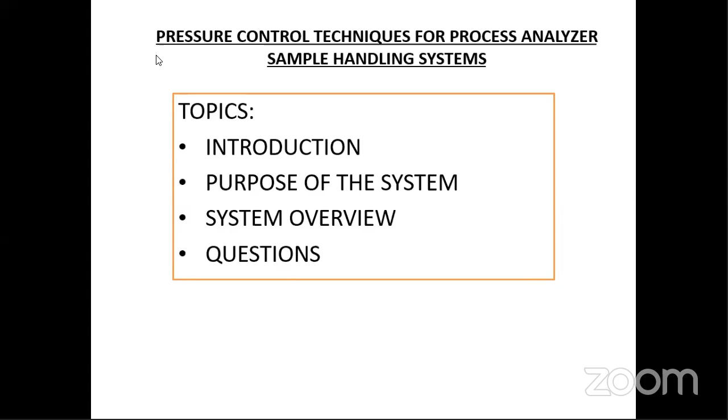Introduction - we've already talked about introduction. I worked for Parker Hannifin. Prior to that was Veriflow Regulators, and prior to that was Dow Chemical, and prior to that was Destec coal gasification. So we've got a lot of miles on this, so to speak. But Parker has gotten into the analyzer end of it pretty good. I want to talk about the purpose of the system, what it does, what problems it solves, system overview, and then any questions you might have.

The purpose of this system is to collect the sample. All analyzers require a sample flow from the process line - you transport it, analyze it, then you have to dispose of it. This system handles that part of the process. It provides the analyzer with a very stable vent pressure. Most of these analyzers, the measurement cell operates under atmospheric pressure, or whatever pressure it operates under, and it has to be stable and constant. It could be an elevated pressure, as long as it's constant. Most people used to use atmosphere because that's fairly constant and easier to use since it's always there.

Now we also have environmental regulations. The EPA guys come along and say you can't do that anymore. You have to collect these samples, control where they go, and dispose of them properly, typically to a flare header, or back into the suction of a process compressor or back into the process. So you have to get it, analyze it, and get rid of it. And you have to minimize any kind of contact with humans. You've got some really bad stuff out there.

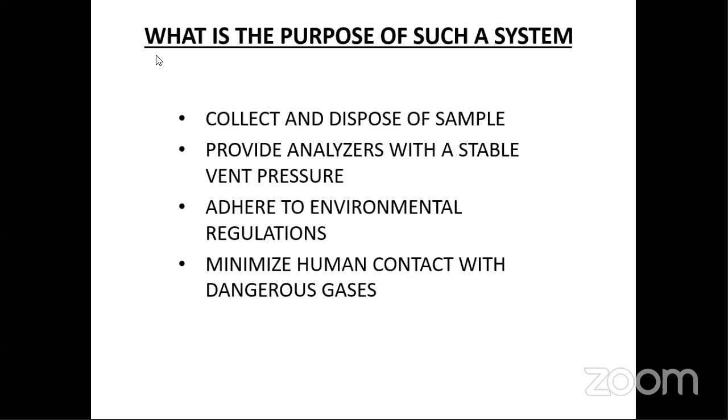I did this just as an exercise. What kind of flows are we talking about out of an analyzer? A typical analyzer is going to have 4 liters a minute flow. That includes the sample through the analyzer and what's called a fast loop sample. So 4 liters a minute is fairly common. If you do that, 4 times 1440 minutes per day, you're talking 2 million liters per year, or 74,000 cubic feet a year.

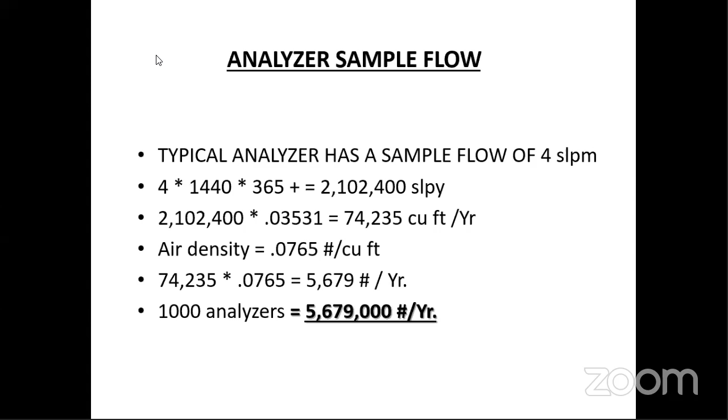And if you use air as a density, as an example, that's 5,000 pounds of stuff per year. If you've got 1,000 analyzers, that's 5 million pounds of stuff per year going somewhere. You say, well, who's got 1,000 analyzers? Well, a lot of people have 1,000 analyzers. I worked at Dow, we had 1,200 analyzers. Exxon in Baton Rouge probably had over 1,000 analyzers. There's a lot of facilities with 1,000 analyzers, but you can figure out how many you want. 5 million pounds a year is certainly significant enough to manage and collect.

So in the old days, your analyzer would be vented to atmosphere. You take a sample out of the process line, regulate the pressure down, control it through a rotameter needle valve into a continuous analyzer or GC, wherever you want to go, into this vent header. A vent header is a collection header that's usually in the analyzer shelter, and it collects all the effluents from the analyzers. Then it goes from there somewhere — used to go to atmosphere. That means the analyzer cell is basically floating on atmospheric pressure, which is fairly constant, and everybody's happy.

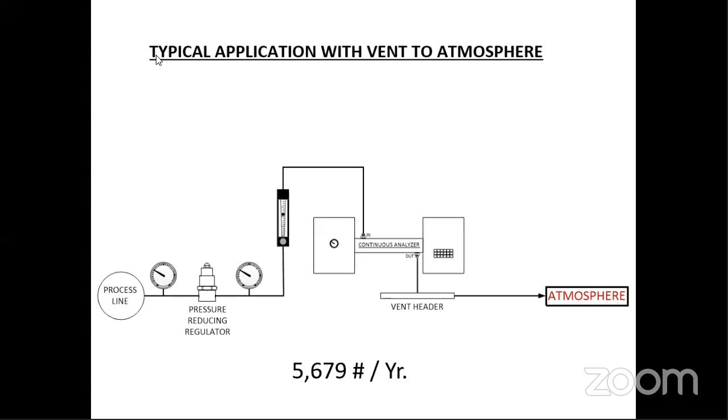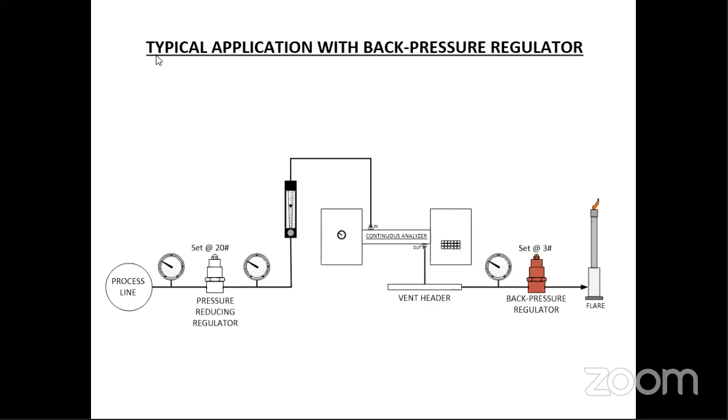Except the EPA. So what people started doing is putting in a back pressure regulator right here. It comes through just like before, except instead of going to atmosphere, it goes through the vent header and the back pressure regulator. The purpose of this is to back-pressure the analyzer at a pressure above the fluctuation that occurs in the flare. A flare header typically runs anywhere from half a pound to 1 or 2 pounds on a normal day. So if you set this thing at 3 pounds, you're controlling and operating above the fluctuation on the flare. However, what happens when the flare shoots up?

And it happens actually quite often. So this regulator, if it's set at 3 pounds and you have 5, 6, 10, 20 pounds over here, your flow stops — your analyzer cannot flow from 3 pounds against 20 pounds. So you've got to do something about it. This is fairly typical, and a lot of people live with this today; they just set a back pressure regulator right here. That also means your analyzer is running at an elevated pressure whether you want it to or not. A lot of analyzers, you don't want to run at elevated pressure — a lot of measurement cells can't handle 3 pounds or 10 pounds or whatever. But this is fairly common.

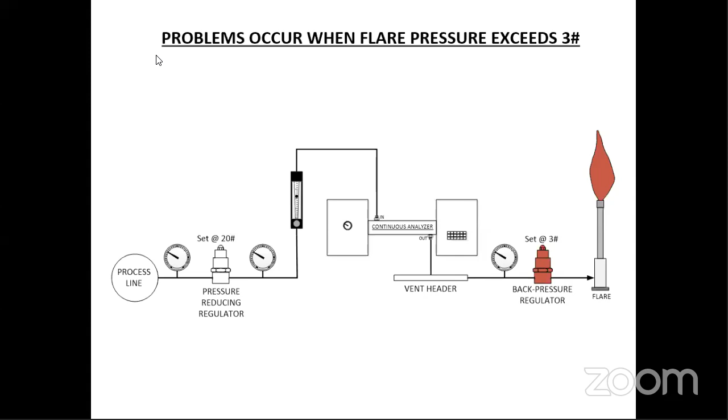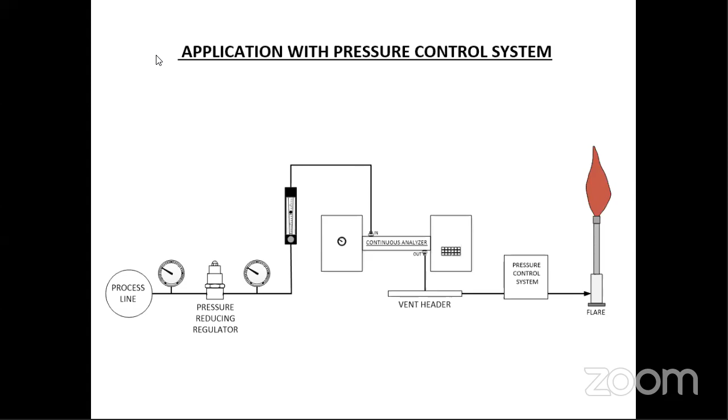So what's the solution to this? You put in a pressure system that collects what comes out of the header and pumps it to the flare at whatever pressure. This thing maintains a constant pressure in the vent while the flare pressure is going all over the place, totally isolating this pressure from that pressure. By the way, this system has been an operating system out for 15 years, literally all over the world, and it's very successful — it works great.

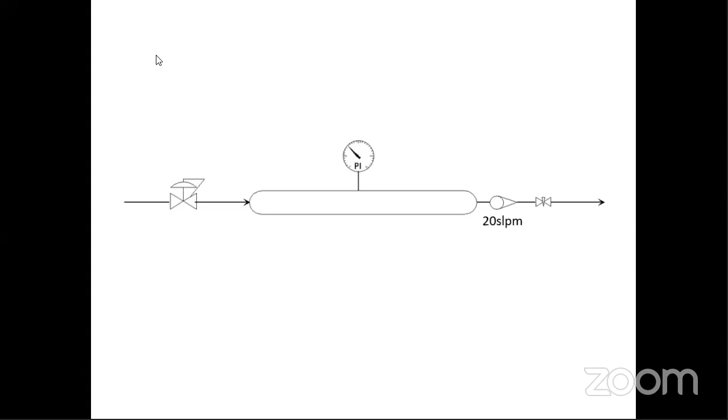And the way it works is very simple — usually simple works better. This pipe could be your vent header that you're trying to control. You put a regulator on one end, it controls the pressure in this pipe, and you take the flow out over here. So as you take flow out, the regulator makes it up, and you maintain a constant pressure in the header, and everybody's happy.

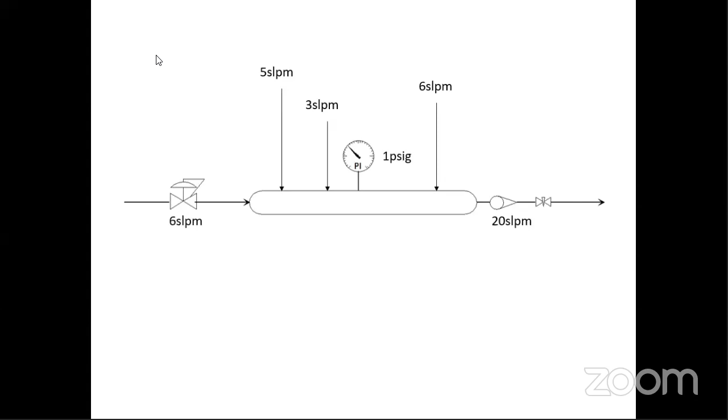So if you start contributing flows into the header, and you're still taking out 20 liters a minute, now you're putting in 8 over here, and you're taking out 20, this guy only has to put in 12. But it's maintaining a constant pressure by controlling the balance. If you keep adding flows, say 8, 6, 14 going in here from analyzers, and you're taking out 20, this guy over here drops down to 6. So the key to maintain a constant pressure in this header is that you have to take out more than you're putting in, so this guy can always stay flowing, controlling the pressure. And it works quite well.

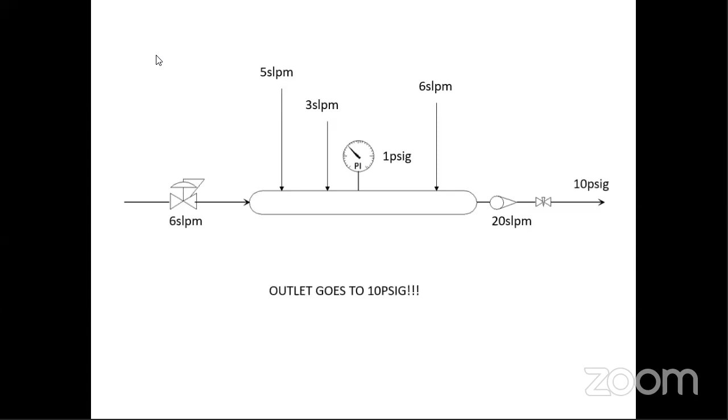So what happens if this pressure exceeds the vent header pressure? Well, you have to have a pump. Some of these back pressures, the planner comes and says, we get 35-pound back pressure sometimes, what are you gonna do about that? Put a pump on it. So the bottom line is, if you can pump it, this thing will work. You just got to find a pump that will pump into whatever back pressures you're exposed to.

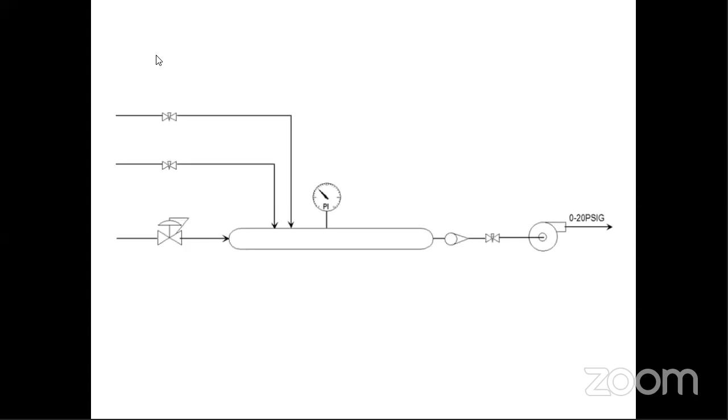So a typical system uses a solid state pump, an eductor. I call it eductor, aspirator, or whatever you want to call it. Take a motive force gas, discharge it through this tail section, and you produce a suction here. And they're very... no moving parts. These things will sit out there for years and years with no moving parts, as opposed to a mechanical pump.

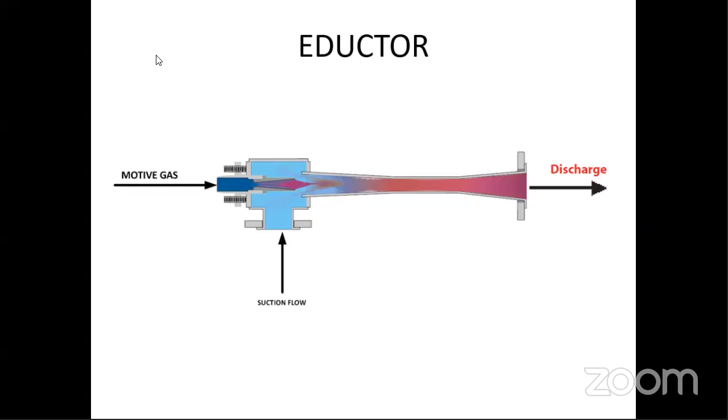So the problem here is this eductor. In order for an eductor to work against a back pressure, they don't like back pressures, so you have to put a lot of motive force gas into them. It takes a big eductor to work against 20 pounds of back pressure and still flow 20 liters a minute through this side of it.

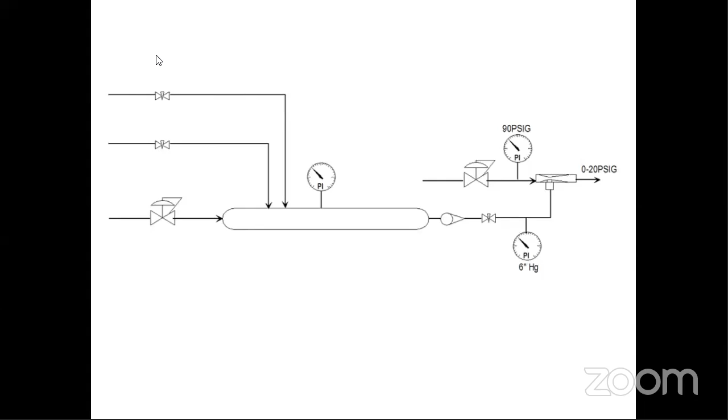So what we incorporated is an economizer circuit, if you will, right here. What this guy does is look at the vacuum that this eductor is pulling, and it throttles this pneumatic booster relay, a multiplying booster relay essentially. If this vacuum starts to diminish, get more positive, we lose vacuum because the back pressure is increasing, because the flare pressure is going up. As you start losing vacuum, this guy right here is looking at this vacuum and says, whoop, we got to boost this up a little bit, drive this guy a little harder. And that's what it does. The motive force gas pressure could change - I have a chart later - but it's anywhere from 30 pounds to 90 pounds, depending on how much back pressure the flare is producing. So it saves a lot on the gas.

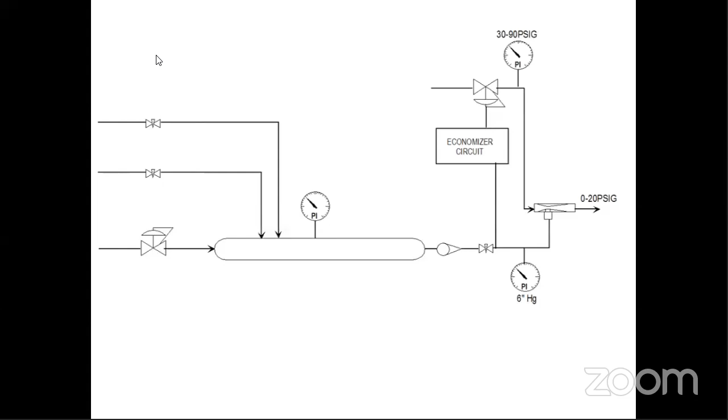All right, that guy right there, you've probably seen before. If you walk outside your house and look at your gas meter, you'll see one of these things. This is a very sensitive pressure regulator, and it's very reliable. So why are you using this thing? Because it's so damn sensitive. This thing can control within 1/10 of an inch of water, which is way beyond what you need for a typical analyzer system. Also, you can get by with a carbon steel body.

Yeah, but I got all kinds of bad stuff in my header - how are you going to get by with a carbon steel body? Well, the stuff in your header doesn't pass through this regulator. The only thing that goes through here is the nitrogen making up the header, so it doesn't see any corrosives or things like that, as opposed to if you were to put something like a back pressure regulator on your vent header - everything in the header would have to pass through it, so you'd need some exotic metallurgy. Where with this guy, you can use literally carbon steel.

So to test how well a regulator controls - and a regulator is a proportional only controller, a very crude proportional only controller - it says that if you change the flow through it, you're going to get a different pressure. It's just got to do that. So that's the only way to work.

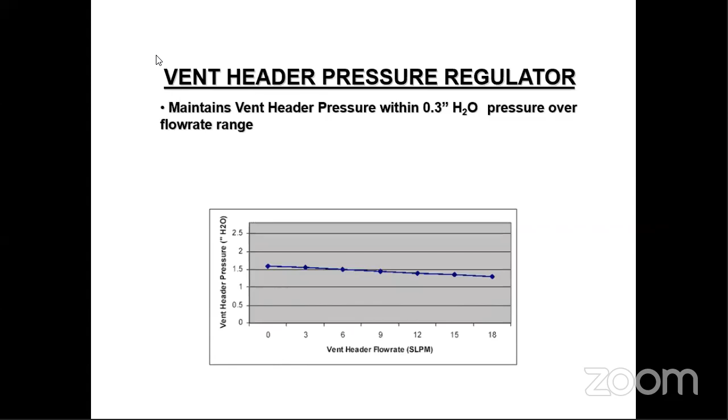But the only way to test it is to get your water manometer and look at the meniscus in there, and it just doesn't hardly move. It's so sensitive. So, all right, that regulator is right there.

So this guy sits on the header. What it's doing is controlling the pressure right here on that header - not there, right there. So the caution is you don't want small tubing for a header because you get pressure gradients. You want this to be big and the flows low, so the pressure over here can be really close to the pressure you're controlling.

So if you provide this regulator with a source of supply pressure, it will pressure this header up as necessary to maintain that pressure balance, while you're sucking it out over here with your eductor, and your analyzers are putting it in over here.

So you might note that when you order a regulator like that, it has a range spring in it - 1 to 3 inches of water, 6 inches, whatever range you want. But most people want to run their analyzers at 0, because that's a good place to run them.

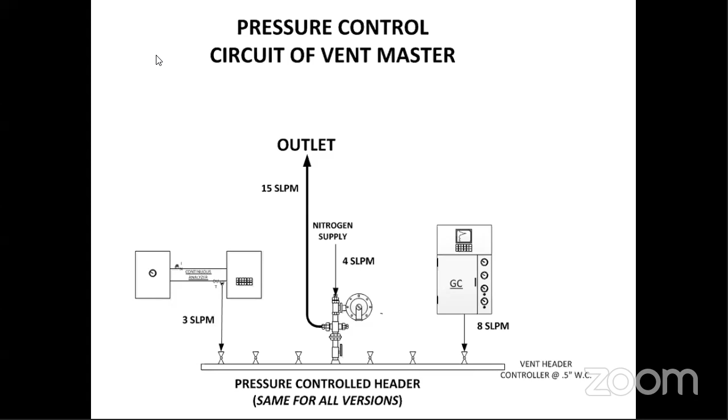Okay, so this is the pressure control part of it right here - this does all the pressure controlling. This is the pump. It doesn't look like a pump, but that's what it does - it sucks out of here and goes out to a flare or wherever you want to go.

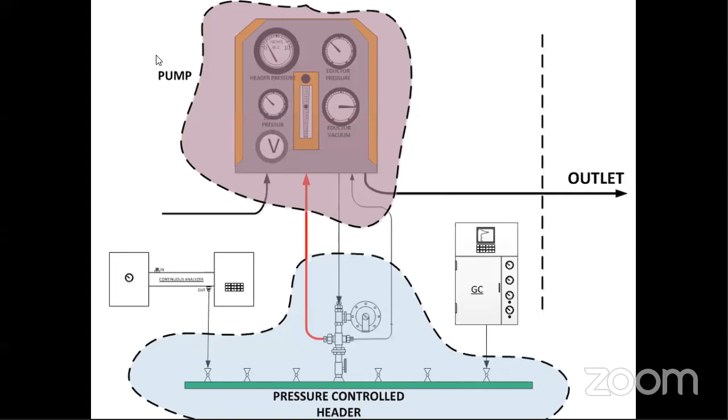And a typical system looks like this. This nitrogen supply regulator maintains a pressure to this box for pneumatic - it's a pneumatic device, old school. And then right here is your vent header pressure gauge, eductor motive force pressure. That changes with the back pressure from the flare.

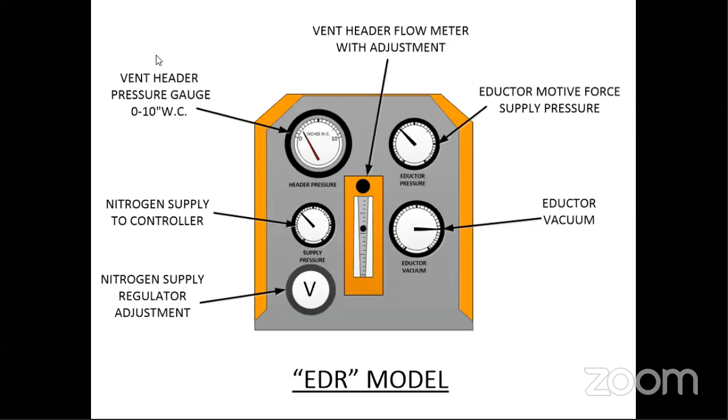And then here's your vacuum - this will stay fairly constant. It doesn't have to be perfectly stable all the time, but that's your differential across this needle valve right here that controls the flow rate. So you've got two flow pressure controls going on - a flow control with this needle valve differential, and the big regulator controlling the pressure in the header. So you've got a very stable system.

This is the system. Again, it takes about 100 pounds of supply gas, typically nitrogen. A lot of plants use natural gas - natural gas will drive these eductors just like nitrogen will.

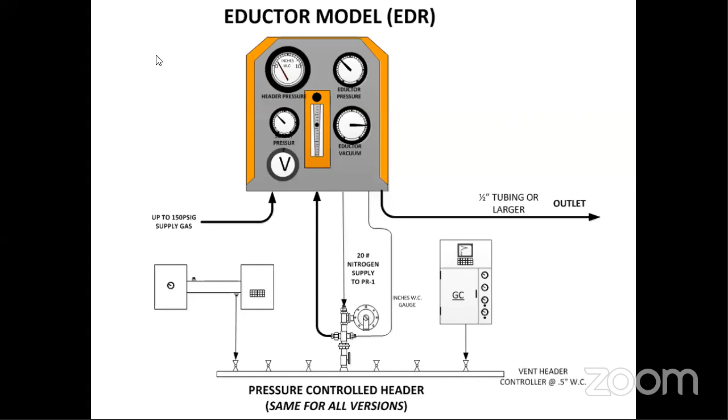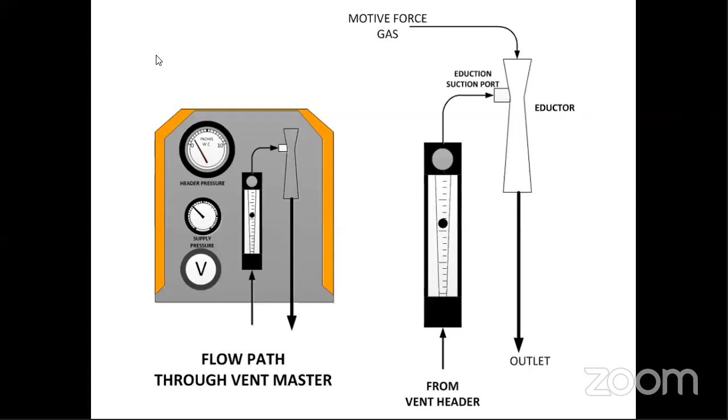What's inside the flow path: you go through the rotameter, the eductor, and out. So this is your quote wetted path right here. So if you have some really corrosive devices, you only have to concern yourself with the eductor and the rotameter - this could be an armored rotameter or a glass rotameter.

The eductor, this typically shows the suction, the performance of an eductor. They got different size eductors. This is the biggest one, we call it A eductor.

Why you have different size eductors is because you want to absolutely minimize your motive force gas usage. So you look at these charts and say, well, I can get by with the smallest eductor based on what the maximum back pressure I expect to see. So if you got the worst case and you're going to go to 20 pounds of back pressure and 20 to...

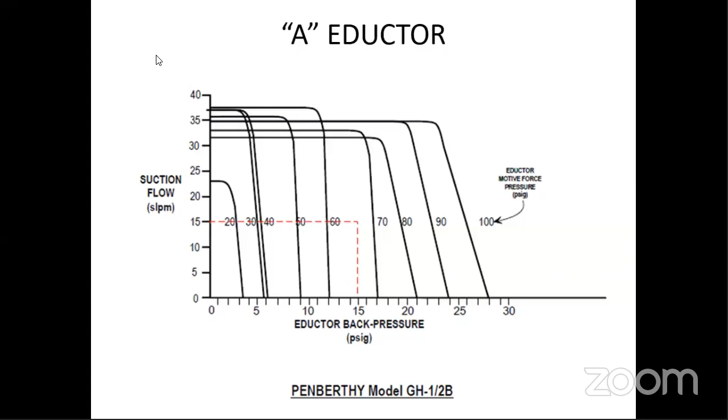25 liters per minute of sample flow, then you need a bigger eductor. That's A eductor, and then they got what's called a B eductor, which means it's a little smaller, and then they got the C eductor. It's even smaller. So if you're not going above, say, 5 to 8 pounds of back pressure, you can still get a lot of flow through that guy. And that eductor literally is the size of a 1/4-inch tubing T. It looks just like one. You can't really tell the difference between it and a 1/4-inch tubing T. That's how small that thing is.

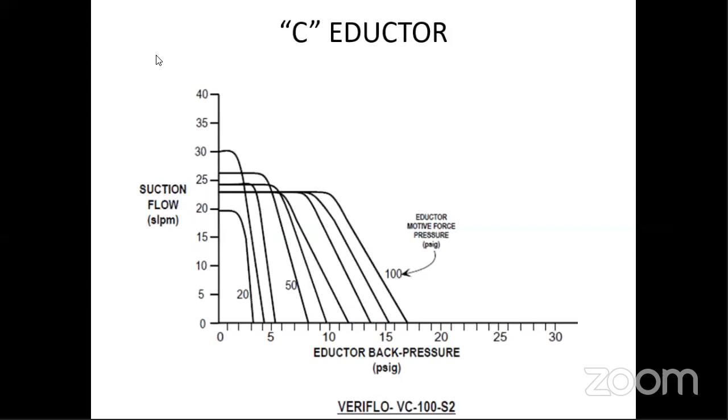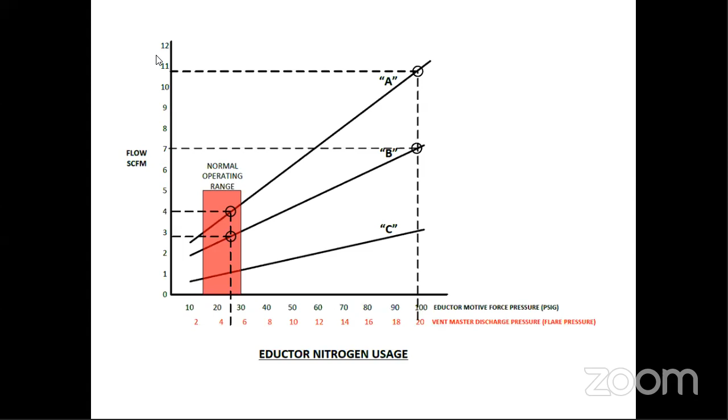All right, this is the nitrogen usage on these three eductors, A, B, and C. Typically your flare pressure is relatively low, and you're going to be kind of in this region right here. So you're not going to be using a lot of nitrogen. You can run these off a bottle, but most plants have nitrogen service anyhow.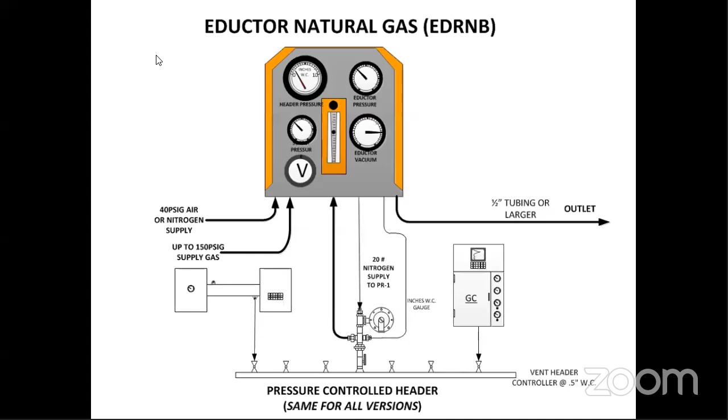This is EDR, we just call it natural gas. The model before that uses nitrogen. Some of the relays in there breathe to atmosphere, so it might breathe a little nitrogen out. But if you're running it on natural gas, you probably don't want this thing breathing natural gas out. So we have a model that doesn't breathe, it's a non-bleed type. That's what the NB is right there. So there's a lot of these guys in these gas plants that use this version, and they use natural gas as a motive force gas.

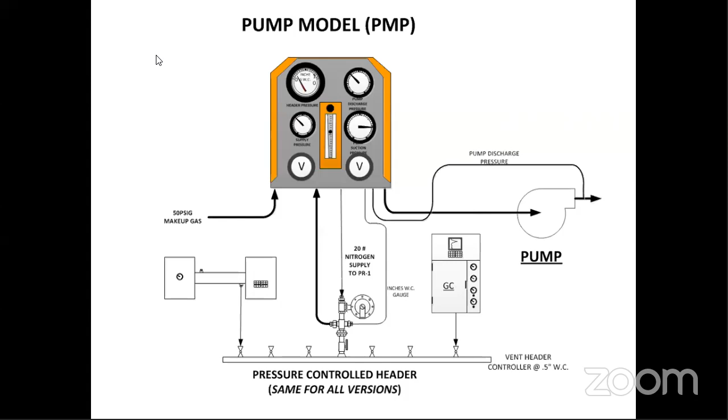So what about liquids? Can this thing handle liquid? Well, you don't want to get a solid flow of liquid in your system, just a gas system. So you need to handle it down on the headers over here. If you expect to have a lot of condensation going on in your header, liquids collecting, you probably need to slope this down to some sort of a liquid sump pump combination. And this pressure, you're basically controlling the head pressure on that trap.

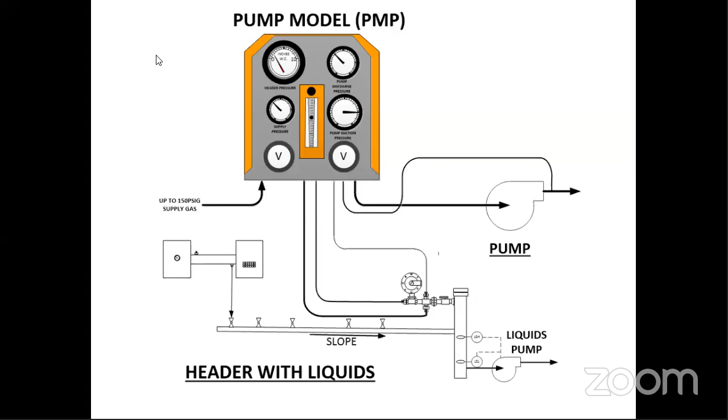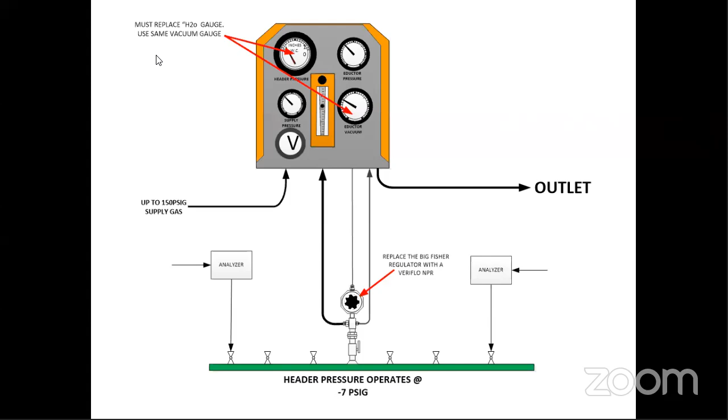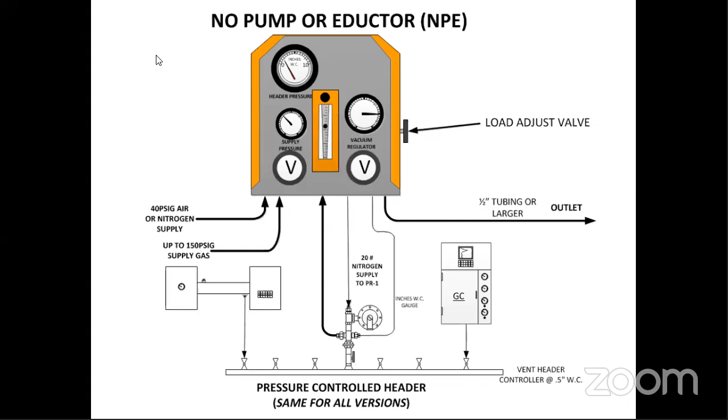You can even get the eductors to go down to some pretty negative pressures, or you can put pumps on them. Let's say you have a system where you already have a scavenging system in your plant that runs on a negative pressure. Well, you just connect this to that. It's just looking for a lower pressure to go to, basically. If you got a lower pressure somewhere, it's fine. And this sort of adjusts the load through this system. This system can't change your plant system, so you kind of isolate it with this load valve, if you will.

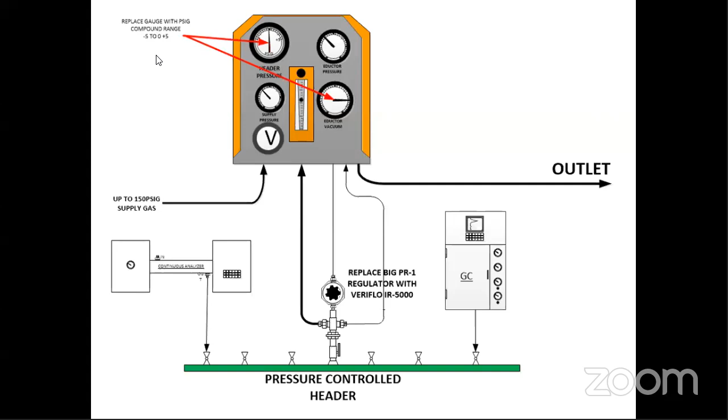That's a different regulator. These regulators, that first regulator I showed you, they have internal relief valves on them. And some plants said, I don't want any relief valve on my regulator. It's okay, no problem, you can get that regulator without a relief valve. And I said, well, I don't know if I want that regulator anyhow. Well, you can put this guy right here. This is a metal diaphragm regulator, standard analyzer grade type regulator, and you can change the set point wherever you want it.

Okay, this is another way to do it. This is different ways how you can hook these things up. For instance, this regulator, the big guy, has a dome vent on it. And you should never, ever connect that dome to a flare or someplace like that, because that's your reference pressure for your regulator. If you connect this to a collection system somewhere, that regulator is going to follow that collection system pressure. So you don't have anything stable anymore.

So typically this is atmospheric pressure. If you're concerned about the relief valve opening up, you can vent this to an atmospheric header, which has a little loop or whatever, but you have to maintain it at a constant atmospheric pressure. And then the pump can have another regulator. So what you have here are dual headers - you've got this header running at atmospheric pressure, and you have this header running wherever you want it, like for fast loops.

Another thing about this header is pulsating flows. These regulators can only do so much in controlling the pressure, and typically what's happening is that the regulator is only putting gas into the header - it can't take gas out of the header. So if you blast that header with a pulse of pressure somewhere, you have to wait for the normal flow to pull it back down to set point.

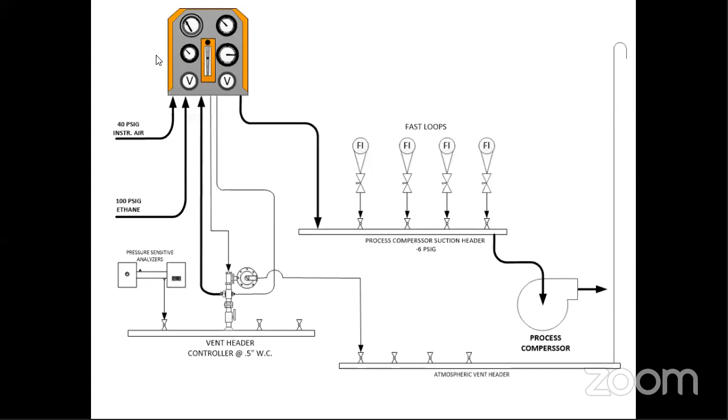So you don't want to pulse these guys, but you can pulse the hell out of this one. A lot of stream switching valves have a double block and bleed, and when they switch, you take the bleed or the pulse and send it somewhere - you can send it right here. You can pulse this guy, but you don't want to send it right there. So you need to minimize the pulsing going on in the header.

This is a vent system with a standby pump. Typically a flare is not going to run 30 pounds of pressure - that's crazy. With Dow, we used to have these big flares, a 36-inch feed line, and when that thing was flaring wide open, the ground was shaking. It was really bad.

So how often does that happen? Every 2 years or something like that. So you don't want to run a mechanical pump for 2 years waiting for that situation to occur. So you can run this thing on an eductor, which you're normally going to run within the 20-pound range. And if it ever goes to high pressure, you can put a high pressure switch on it, turn on the pump, and it will discharge through these check valves.

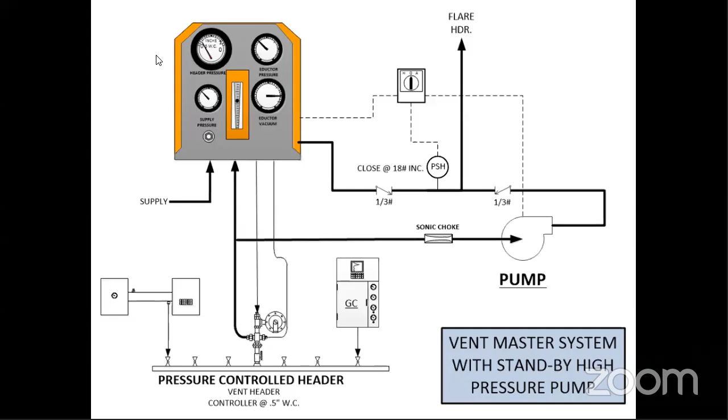This is called a sonic choke. A sonic choke is a device that's basically a flow controller, if you will - it's a solid state flow restrictor. Once this thing is choked, you can't increase the flow. So you size this guy for the maximum flow that you want to take out of this header and just let her eat. Worked good.

This is basically the same system with the sonic choke on it. This is a typical system - this regulator controls it at atmospheric pressure, but there are some places on Earth that have large...

...rapid barometric fluctuations, especially in Canada, the north, and the western section. The fronts come through and the barometer drops like crazy. Well, if you've got all your analyzers on these guys, you can see 3% error easily - that's just 1 inch of mercury variation in the barometer.

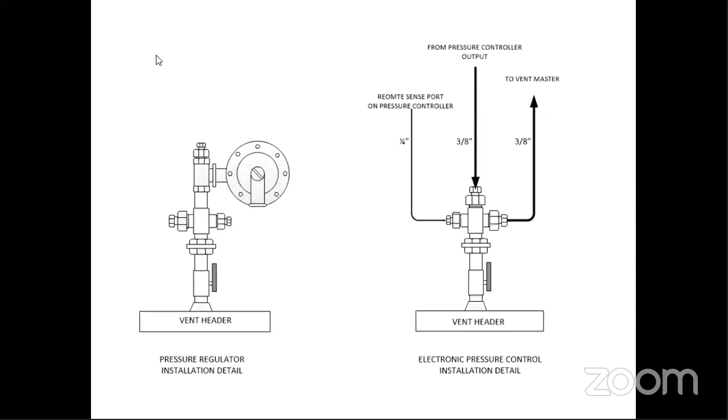So we have plants up there that said, man, I can't stand that anymore - these fronts come through and it just throws my analyzers all over the place. So what can you do? What we can do is take this regulator off, and we still use the T right here. We're going to control this header with an absolute pressure controller, an electronic absolute pressure controller.

Typically what you want to do is control this thing slightly above the typical barometer reading - essentially, say, 30 inches of mercury. Your barometers don't usually go too much over that, so you're typically going to stay positive in your header. But relative to the atmosphere, it can be more or less positive.

So you stick a pressure gauge on this thing that's looking at atmosphere, and it's going to be moving around. The guy said, man, the thing's just not controlling, it's moving around all the time. It's moving around all the time because the barometer is moving around all the time, okay? This guy is really nailing it on an absolute value.

If you really want to control pressure very accurately, this remote sense is invaluable. This is a standard unit with a remote sense, so this unit can be on the other end of the building. As long as you've got this remote sense static line, you can control the pressure on this side without worrying about line drop. It controls the pressure where you want it controlled, thanks to that little remote sense. That applies to any application, not just this one.

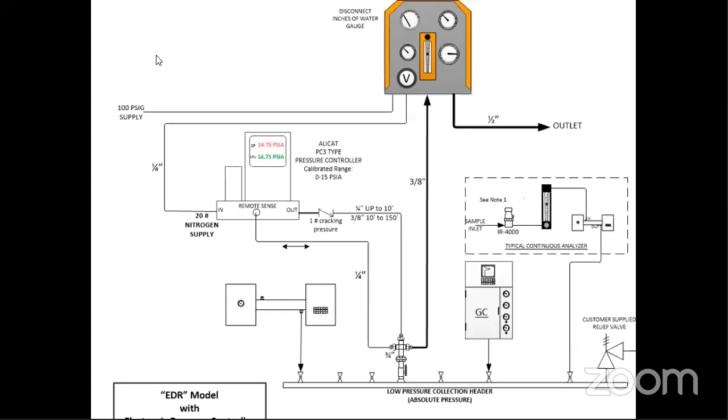This is a system that just keeps evolving to handle different scenarios. This particular one...

Talking about pulsing headers, we found an application on the electronic unit where the electronic controller controlled the vent header directly. They had an ARV, atmospheric reference vent, which is basically a pulsed pressure coming from the sample loop in an analyzer. It's got to go somewhere, so they typically dump it into this atmospheric control header. These things operate at 15 to 20 pounds of pressure with that volume in the sample loop.

That blasts the header with extra flow, and it has to recover, so you can see a quarter-pound variation for a few seconds before it settles back down. That's okay with one analyzer, but if you've got a bunch of analyzers pulsing into this header, you can cause problems.

So what we do is isolate these pulsing flows. You might say, well, I've got stream switching, double block and bleed. That's no problem, we connect that right into the suction of this eductor, so it's not going to pulse the header. It will just handle it up there.

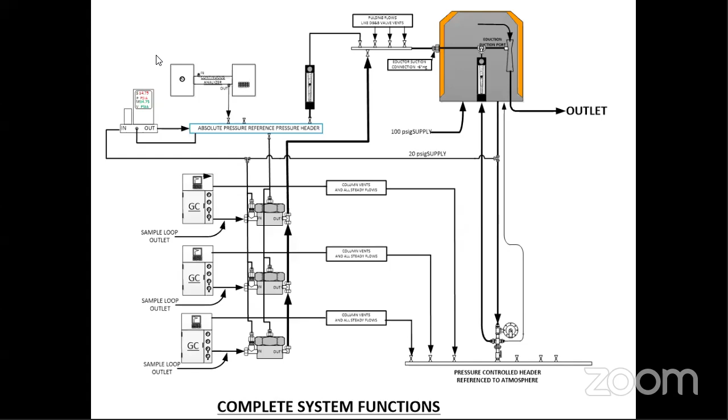When you turn this flow off, upstream of your sample loop equilibrates to the pressure that was already there, and it won't even bobble the pressure at all, so it's very constant. You can handle pulsing ARVs and pulsing stream switch valves, and this application also wanted barometric pressure compensation or control. So this absolute pressure header sets the set point on all three of these devices, following barometric pressure, controlling absolute pressure, and handling all the flow pulses. This is an extreme case, most people aren't going to do all that, but some do.

Okay, here's a system for when you don't have any nitrogen or natural gas. How do you run this thing? Well, you've got to have a pump. So what we do is take basically what comes out of this system at the suction of the pump and go to return. We also take a feed off of it that goes back into the unit to operate it, so this feed feeds this regulator right here. It basically operates without external motive force gases.

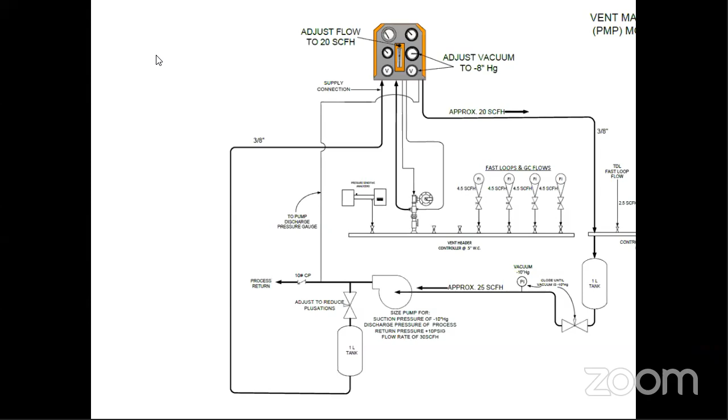That can have different headers on it as well, like fast loops can go in right here. It's always a good idea to separate your fast loops. A fast loop is just an expediting type of thing. You want to get a sample from point A to point B, so you take a lot of flow to get there quick, then take a little slipstream off that fast flow, the fast loop, versus your analyzer flow.

That's what one of these looks like, just the box, yellow, orange, whatever. This particular rotometer is an armored rotometer, since a lot of folks don't want glass, so we have an armored rotometer.

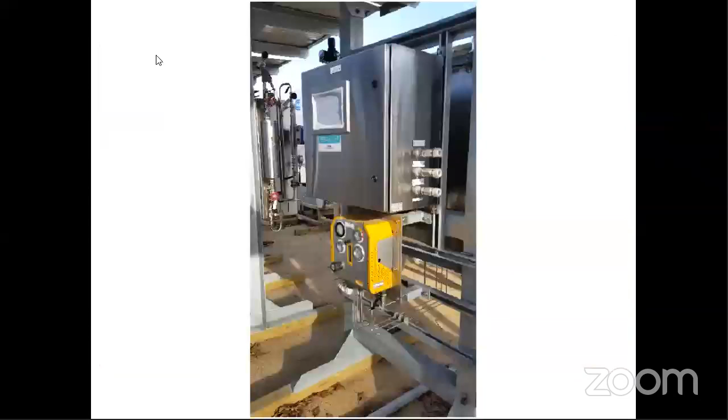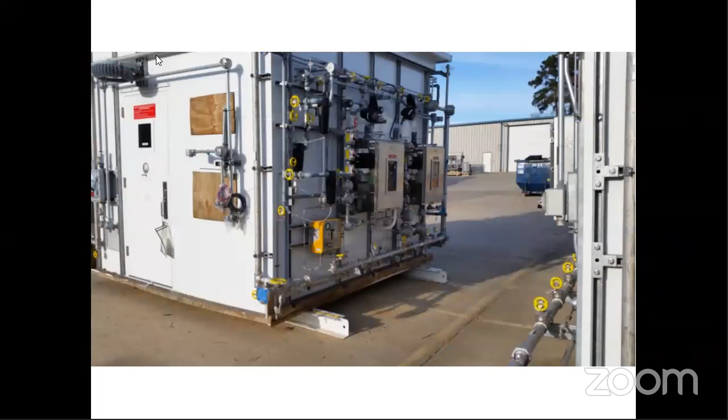Here's another picture, there's two of them right here. One of these will handle one analyzer house, and some of those houses are as long as from here to that wall over there, with 10 or 12 analyzers in them. It'll cost like $3 million or something. So this is one right here, one there, just all over the place.

Okay. Surely you guys don't know everything. Got to have some question.

So the needle valve adjustment, that's a manual adjustment? Yes, it is.

That needle valve causes more problems. So when we build things, we put all these adjustments in. Most analyzer guys, instrument guys, they like something to turn, gauges to look at. This could literally be a blind system.

No gauges, no rotometer, and it'll function just as well. So if they've got a rotometer on there, they're going to turn it. And what happens is when they start turning it, they turn it clockwise, and what you're doing is lowering how much flow is coming out of the header, to the point where the regulator is no longer making up the pressure in the header. So you get an increase in header pressure.

So the only way to make this thing work is open it up and let her eat, so to speak. Then you've got to take out more than your analyzers put in. So there's another adjustment on the side.